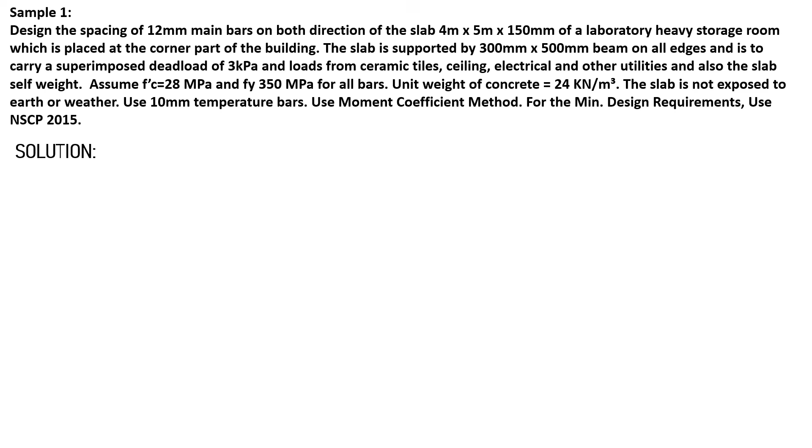Okay, let's begin. This will be our guide for the upcoming solution using the coefficient method. So, let's assume this is our slab. The longer side is 5 and the shorter side is 4.

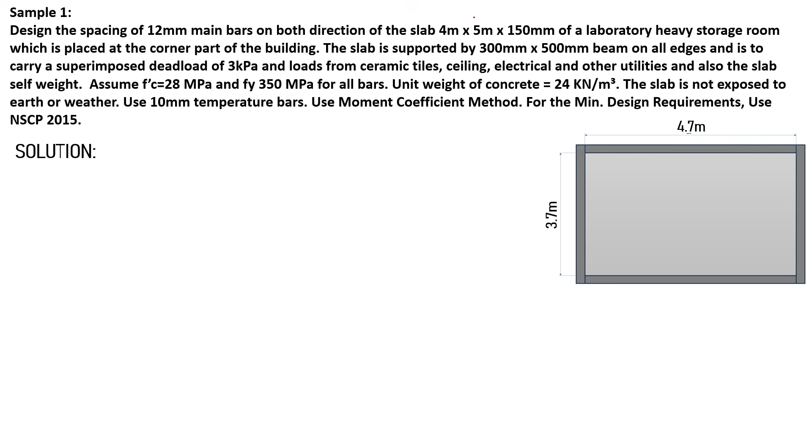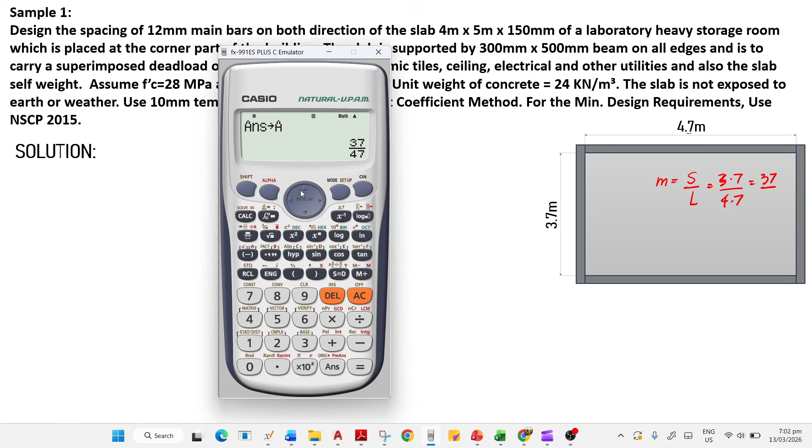So M is the ratio of the short over the long. This is 3.7 over 4.7, that is 37 over 47. It comes out to 0.787. Okay, next let's get the moment in those directions.

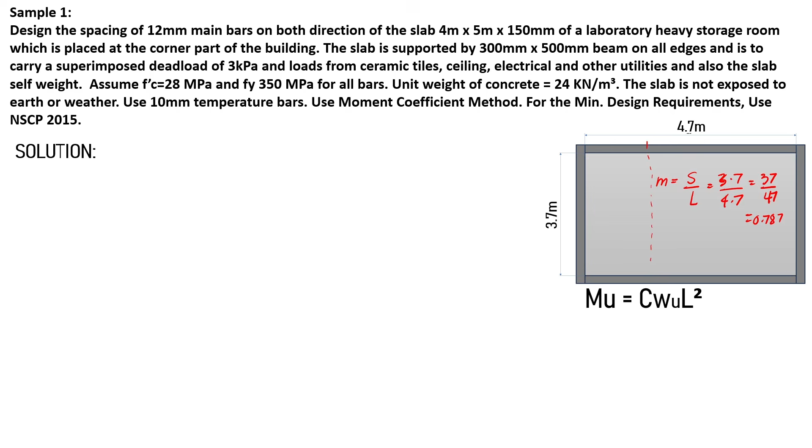So we said that is divided into strips. Along the shorter side and along the longer side, that will be divided into strips. This is called column strip, middle strip, and column strip. Same here - column strip in the short direction, middle strip in the short direction, column strip in the short direction.

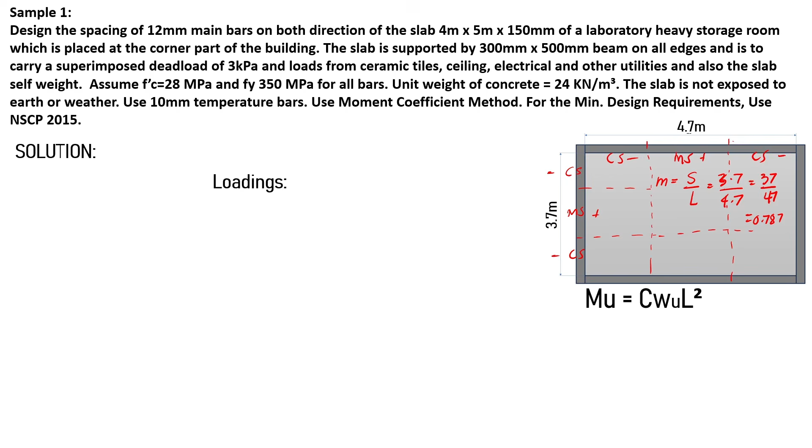So for the loadings, according to the problem, we have the dead loads. We have the superimposed dead load, which is 3 kPa, so we have a load pressure of 3 kPa. We multiply this by 1 meter since we're working per 1 meter strip, so it becomes 3 kN per meter.

Next is slab weight. So the slab weight - we have the area of the cross-section of our design area, which is the height of the slab, 150. So we have 0.15 times 1 meter strip, for a total of 3.6 kN per meter.

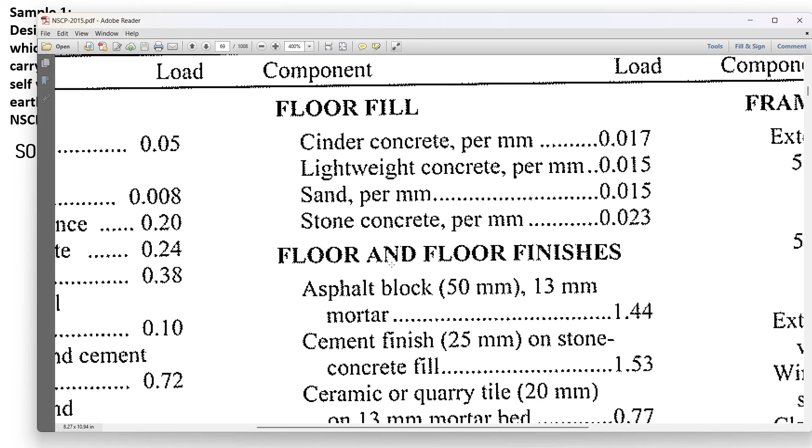Another is the tiles. Using the NSCP 2015 table for minimum design requirements, we have 1.10 for tiles. What I used here is floor finishes, and I used quarry tile with a mortar bed of 25 mm. So we took the larger value, 1.1, and the unit is in kilopascal. So 1.1 times 1 meter strip gives 1.1 kilonewton per meter.

Next is ceiling. For the ceiling, I used gypsum board. So we have this gypsum board, and it's listed per mm thickness - each mm is 0.008 kPa. So let's assume I use 20 mm thick ceiling. I'll just multiply - it becomes 0.16 kilonewton per meter, again per 1 meter strip.

Next is others, like electrical and other utilities - there's piping and various others. So let's assume that's around 0.24 kPa, and we multiply by 1, giving us 0.24 kilonewton per meter. So all in all, we have 8.1 kilonewton per meter as the uniformly distributed load.

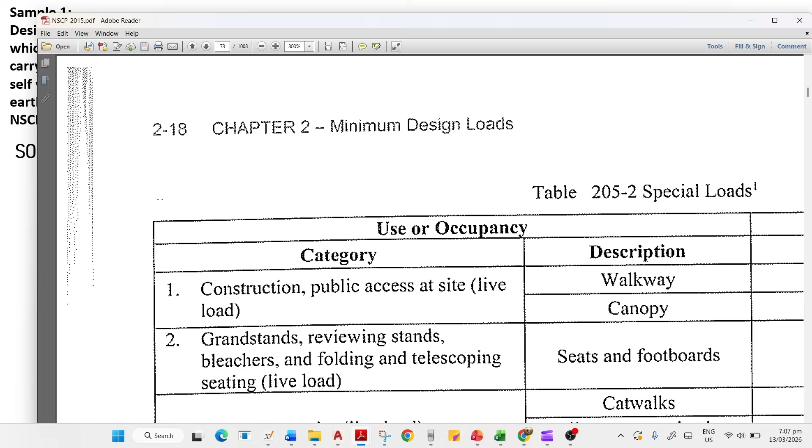Now for the live load, let's call it the service load, WLL. We multiply, getting it from the table as well, so I got 12. Based on NSCP 2015 codes, minimum design requirement for live loads, the use of our building is storage.

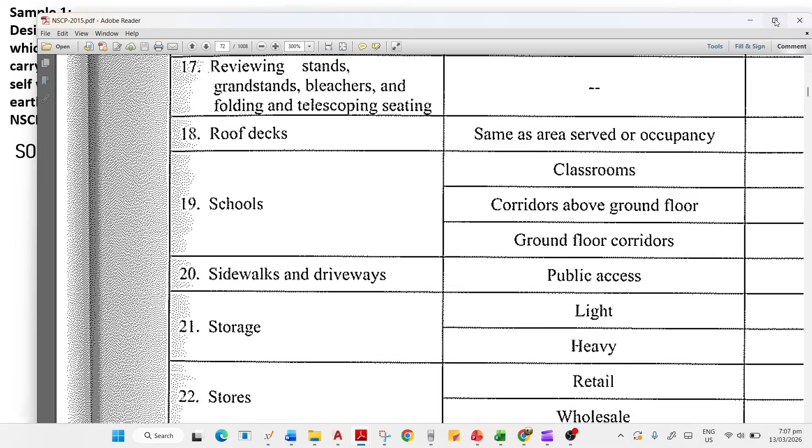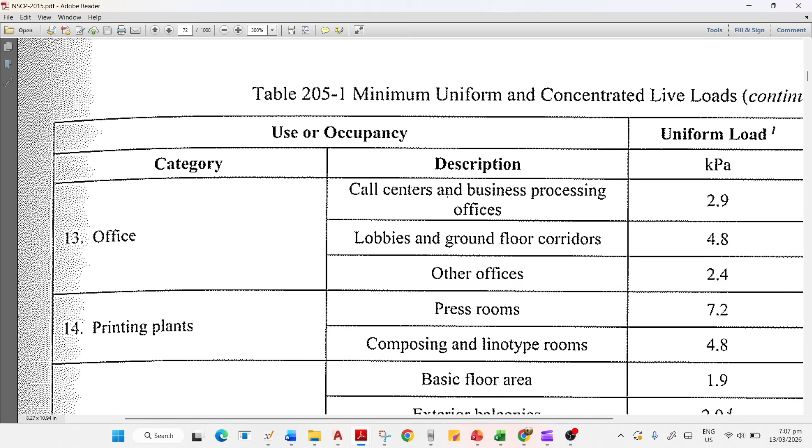So, pwede na to. Number 21. Storage, heavy, yan. Storage is 12 kilopascal. So, sa list ng mga live load, gamitin lang natin tong table 205-1. Tinimes ko lang din ng 1 meter strip.

So we have a 12 kilonewton per meter. Pwede na natin kunin yung factored. Pag dead load, kinuha natin as 1.2 dead load, so we have 9.72 kilonewton per meter. And wuLL is 1.6 live load, so 19.2. Kinuha natin yung total, we have 28.92 kilonewton per meter.

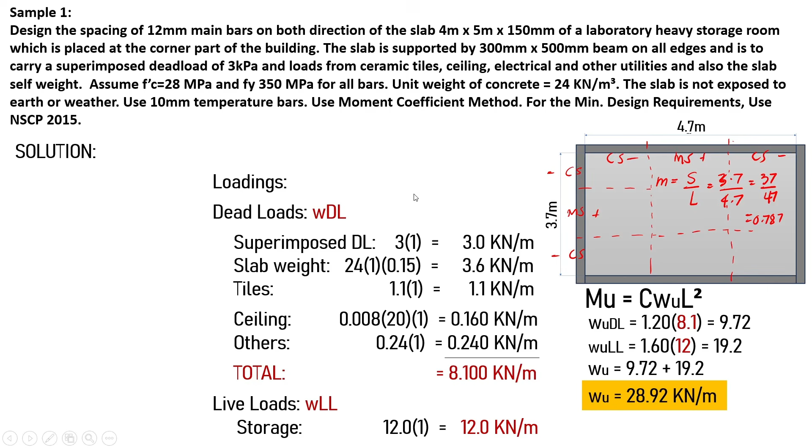Ganyan lang, detailed and ganito yung sa actual ginagawa natin. Importante na makuha natin din yung coefficient. So by coefficient method, I will use the table for coefficients.

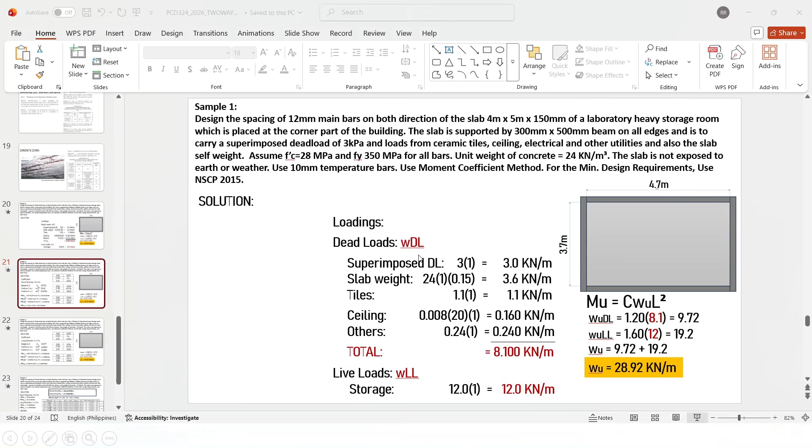Sisimulan ko sa short direction muna. We have 3.7 meters clear span. Kuha tayo sa table number 1. Negative coefficient, kunin ko lang dito. Dinisan ko lang to.

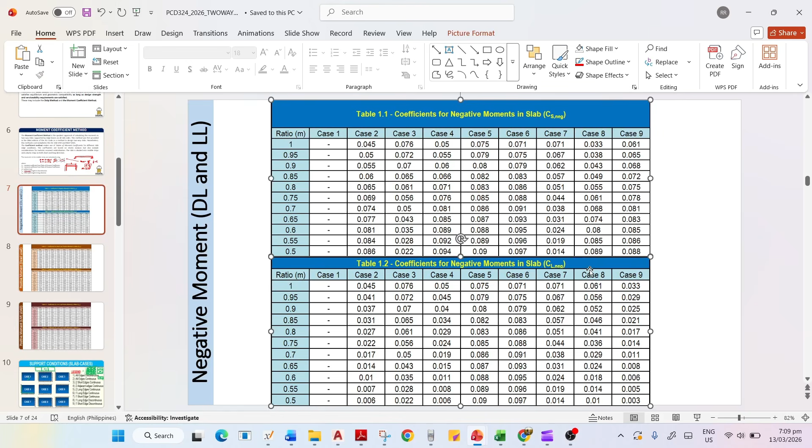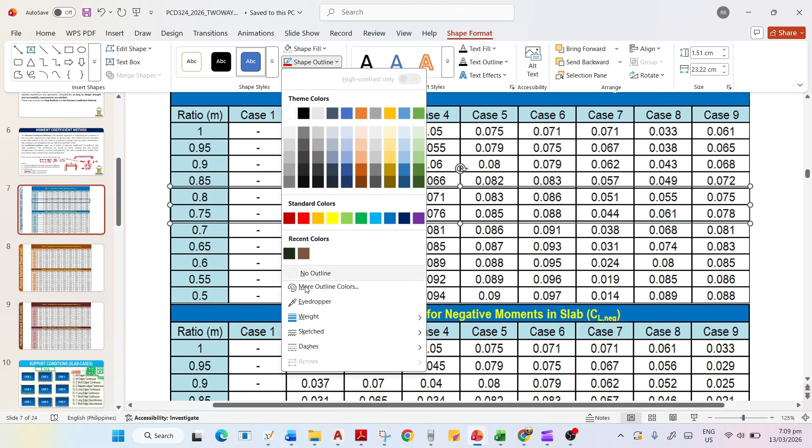Kung pagbabasihan ko yung nakuha natin na ratio, we have 0.787. So pumapatak na dito siya, babagsak dito, sa part na to, dito. And then dito siya, sa pagitan ng 0.8 at 0.75.

So ang gagawin natin, as the introduction said, mag-i-interpolate.

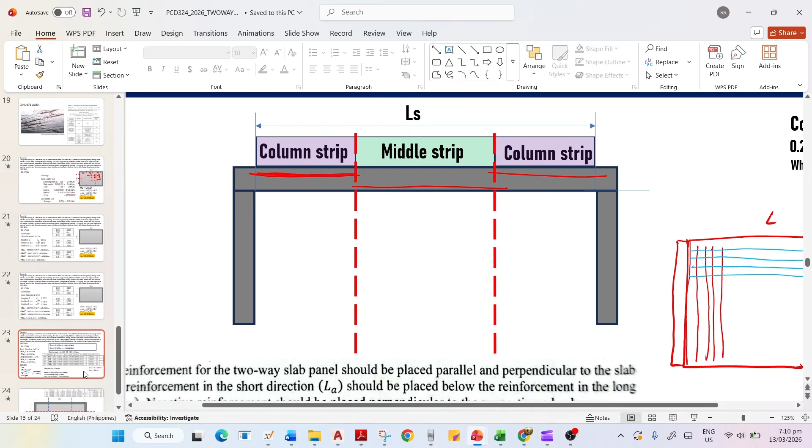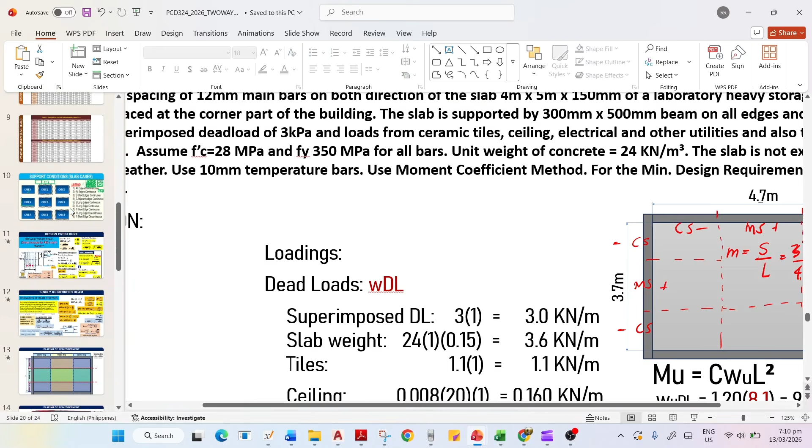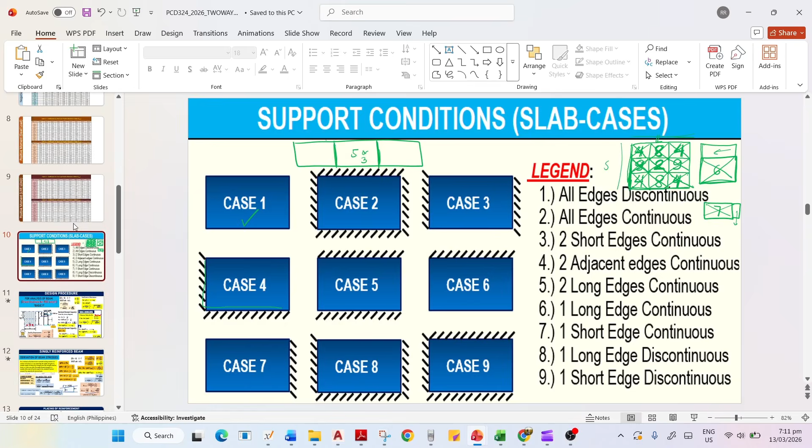Ngayon, gusto lang natin malaman kung anong case yung ating floor, anong condition. Sabi sa problem, our building or our slab is located, heavy storage is placed at corner part of the building. So pag sinabi natin corner, sa condition, it is in case number 4. Balikan na lang yung previous video para sa mga samples na mga nabanggit. So case 4 pala tayo.

Sa case 4, dito tayo mamimili: 0.071, 0.076 between that. So by interpolation ang gagawin ko. Gumawa ako ng isang maliit lang na calculator

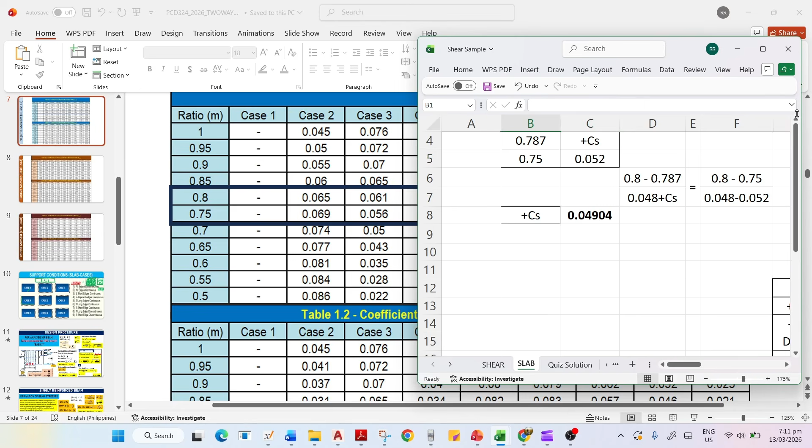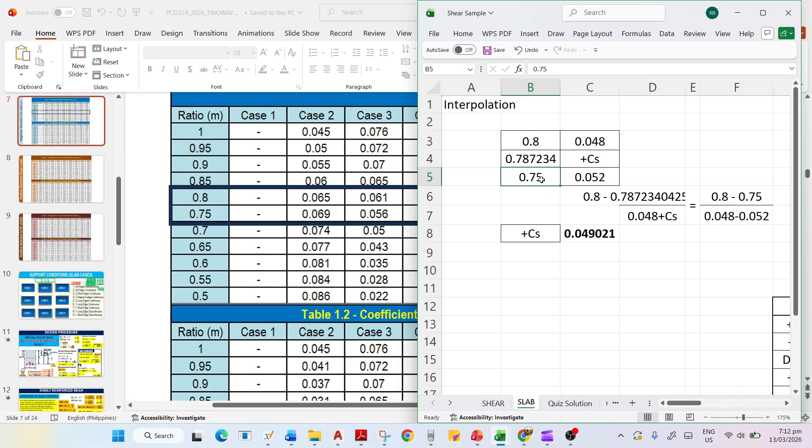Ilalagay ko lang dito yung ating factor 0.8, tapos yung ating ratio, that is 3.7/4.7 diba, para sakto, ay 47 pala. Tapos we have 0.75, tapos pagdating sa case 4, we have 0.071.

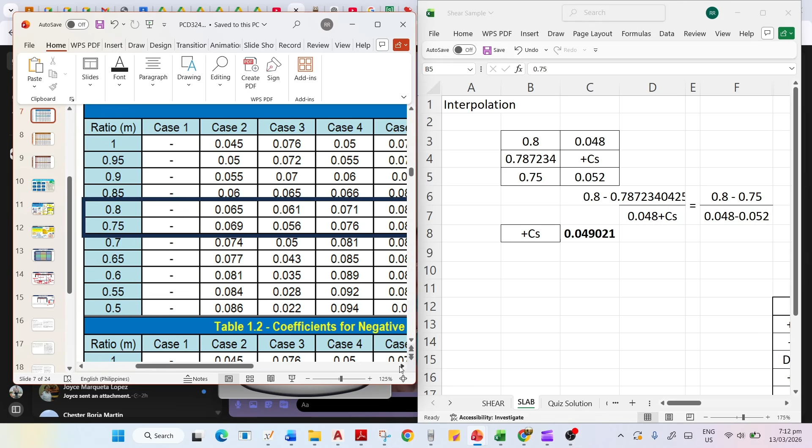At negative ang ating kinukuha sa short direction. And we have 0.076. So meron tayong 0.0723. Sa negative, negative CS, we have 0.0723. Pagdating nga pala sa linear interpolation, manually.

Pwede tayong, ang tawag dito, ang ginagawa ko, 0.8 minus this, tapos sa ilalim, ito minus ito, at ito minus ito, at ito minus ito. So one unknown lang siya, pwede natin makuha yan.

Okay, so proceed tayo. Yan yung sa CS, negative, or negative moment at short. Punta naman tayo sa positive naman.

Yan, positive dead load. Hiwalay kasi ang dead load. Tapos meron din tayong positive live load sa short direction.

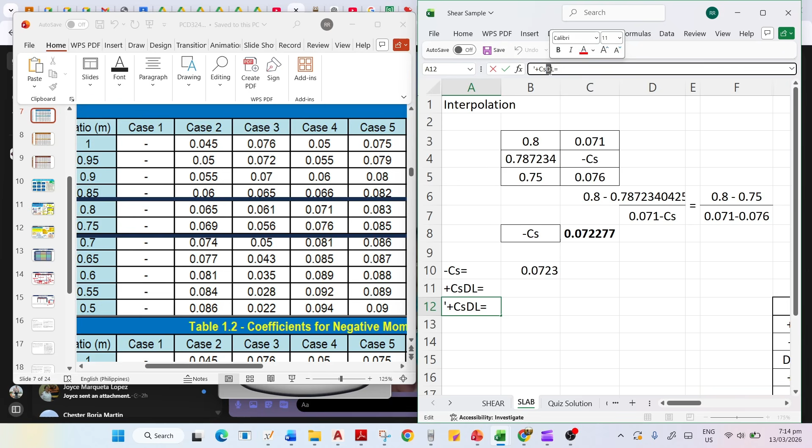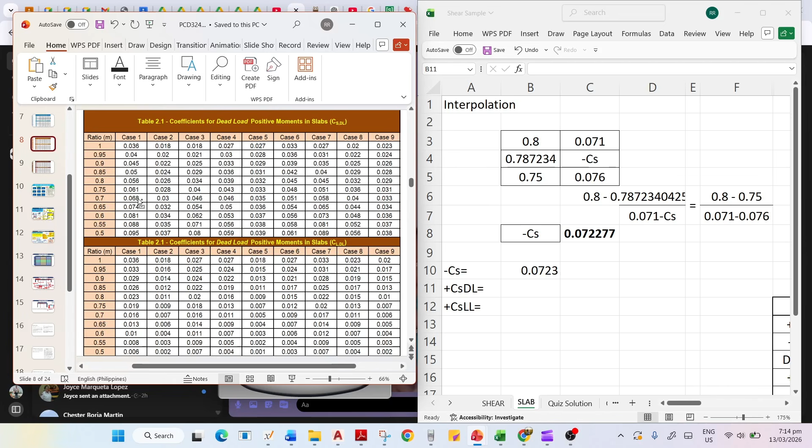Gagamitin ko yung sa table. Kunin ko lang itong marker na to. This one, case 4, 0.8 tsaka 0.75 sa pagitan. So we have case 4, we have 0.039. Tapos ito magiging ano no?

CS po yan. Sabihin natin yun yung X. Tapos this one is 0.043. So meron tayong 0.04.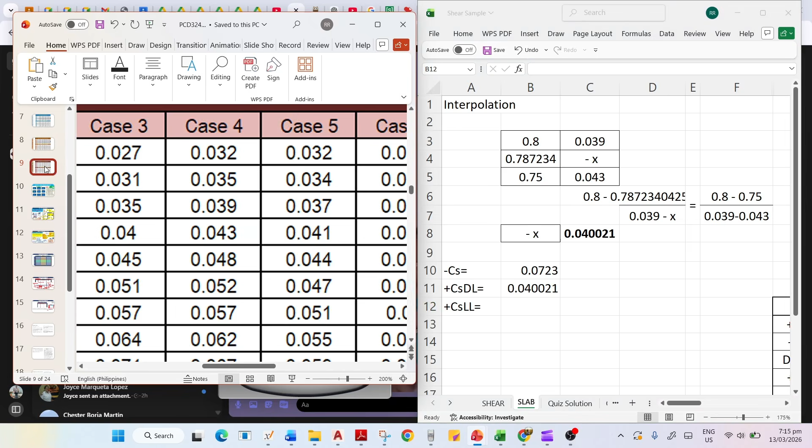0.021, ganyan. Next, sa live load naman, case 4, tapos sa pagitan ni 0.8 tsaka 0.75, obviously that is 0.048 and 0.052.

So we have 0.049, 0.021. So you can do your own interpolation, calculation using calculator po. Salamat po dyan.

At sa longer side naman, para tuloy-tuloy tayo. Sa longer side, ito naman yung table sa baba ang gagamitin ko. So kopya. Palitan ko lang to, instead of S, we have L.

CL. This is CL also. And this is CL.

So balik tayo sa positive. At ito naman ang gagamitin ko. Sa pagitan ni 0.8 at 0.75, case 4, 0.029 tapos 0.024. So we have 0.027723, ay sorry, baliktad, dito ko dapat nilagay, 0.027723.

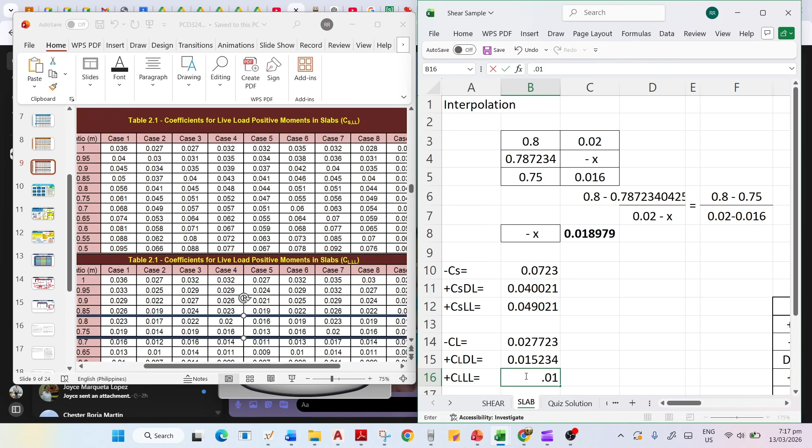Yan. We have here case 4.8. 0.016 and 0.013. So, meron tayong 0.01523 po. So, lastly, we have case. Ayan, sa baba tayo. Pagitan ni 0.8 and 0.75. Case 4, 0.02 and 0.016. So we have 0.018979. Yun, natapos din. So dapat dito makuha natin yung tamang coefficient.

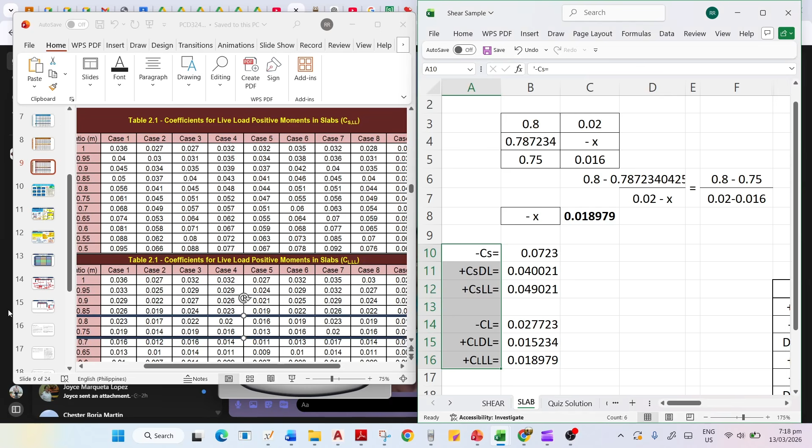Kaya nga siya tinawag na coefficient method, no? Approximate method. So tignan ko nga kung tama yung aking mga nagawa sa aking solution. So by coefficient sa short direction, nakakuha ko ng 0.0723. Next, sa positive dead load, 0.040. We have 0.049021. Okay na yan. Hindi ako nag-round up dito. Dito nag-round up ako.

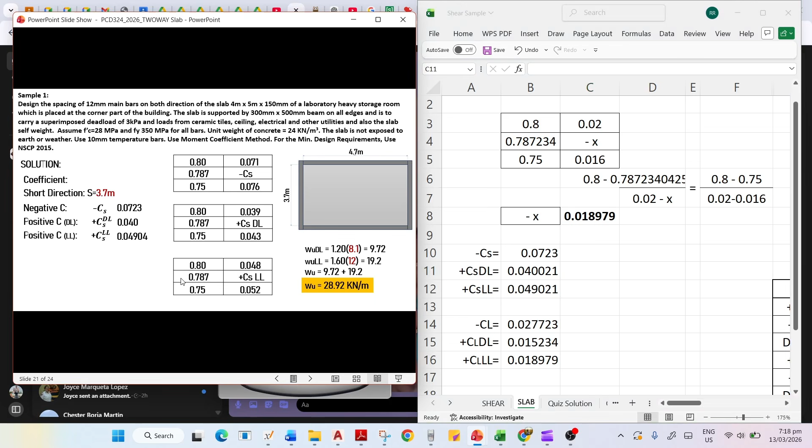Next, sa short direction, tuloy-tuloy na natin. Kuha ako ng moment. Using the formula, M is equal to C W L squared. Kitang-kita naman na ang negative moment natin is 28.624. Tingnan nyo, 3.7 yung length. Then, nanguha ako ng dead load positive, 0.04. But take note, yung dead load coefficient is dependent on the dead load itself. So ang gagamitin ko lang is yung WDL, 9.72. Paki-take note yun.

Sa live load naman, ang gagamitin ko is yung live load, 19.2, at ang coefficient is yung sa live load. Dependent po yun sa isa't isa. So we have 12.89. Pag negative, magkasama na si dead load at si live load. Sa positive, magkahiwalay sila, so ito total mo sila. 18.213. Meron lang tayong dalawang moment sa short direction, isang negative, isang positive. Yung positive ay yung middle strip and yung negative is yung column strips. We will do the same sa long direction.

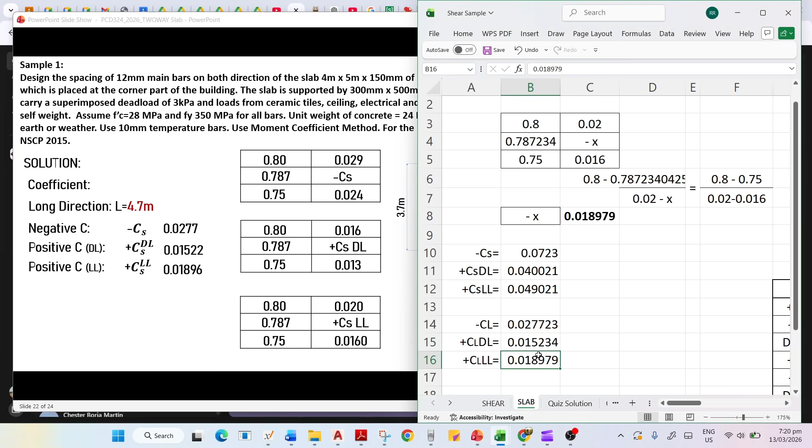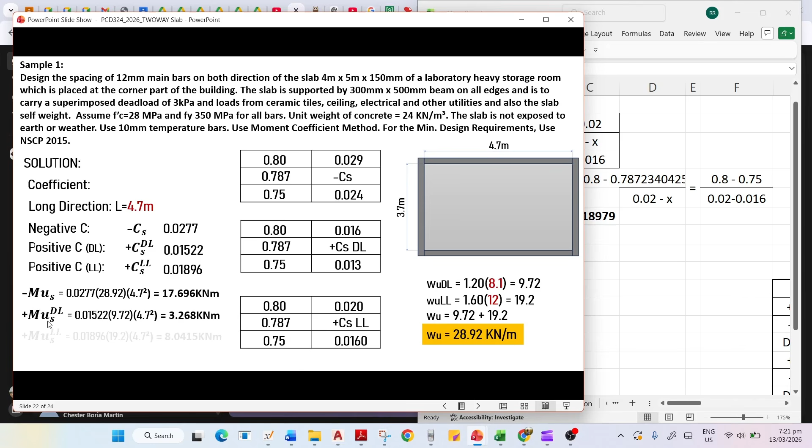Sa long direction, ito yung nakuha natin, 0.0277. Next, we have 0.01522. Then, we have 0.01896, by interpolation po. So we will do the same. We have negative. Medyo may pagkukulang ako dito. Sa long, dapat ito L. Edit lang natin. Dapat ito sa long, para di tayo malito.

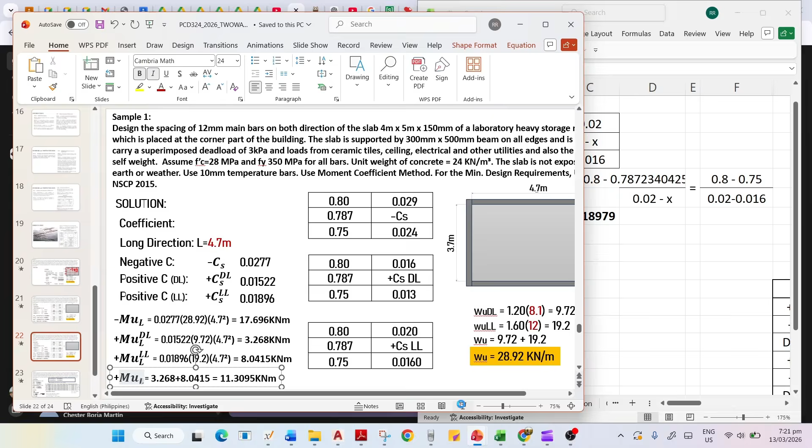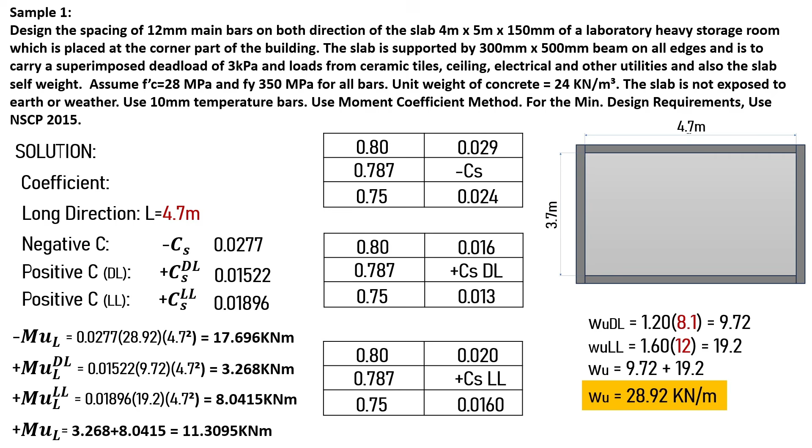Malinaw na lalagyan natin ng konting oras ang moment, kasi pag nakuha natin yung moment, magde-design na lang tayo. Madali na lang yon. Gamit lang tayo ng basic concept natin. From MU, we have to get Rn. Si Rn gagamitin mo sa rho using this formula. And we have As is equal to rho b d. Kuha na natin yung apat. Pero meron pa akong idadagdag.

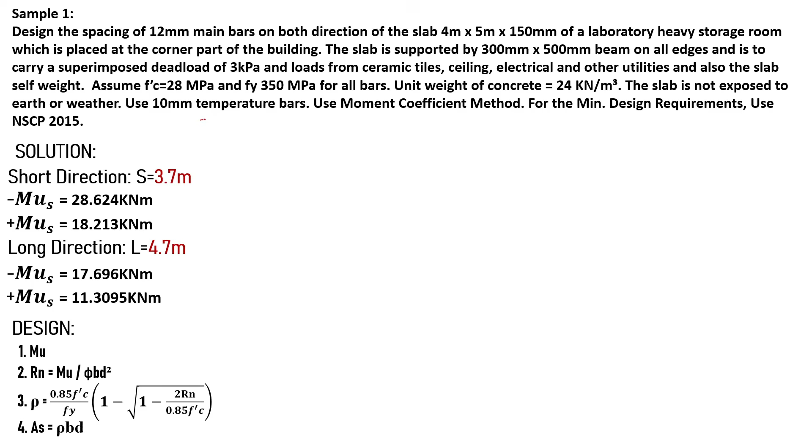Nabanggit na problem na case 4 siya. Ibig sabihin, kapag case 4 ka, nasa corner ka. Pagpalagay natin na ganito yung slab mo, yung beams. Ito yung dinidesign natin, 5 by 4. Kapag hinati natin into strips along the longer side, yung isang side ng case 4 is discontinuous. Dito naman sa hati ng short side, ang discontinuous niyang part ito. So dapat meron tayong i-add na moment para sa discontinuous.

Yung moment sa discontinuous is nasa negative portion, nasa column strip, para sa short. Para naman sa long, ang discontinuous niya is nasa column strip din, so negative discontinuous din. We can now solve for discontinuous. If there is a discontinuous moment, we need to get 1/3 of the positive moment calculated in this direction. This is 18.213. Dito naman, 1/3 sa long direction, 11.3095.

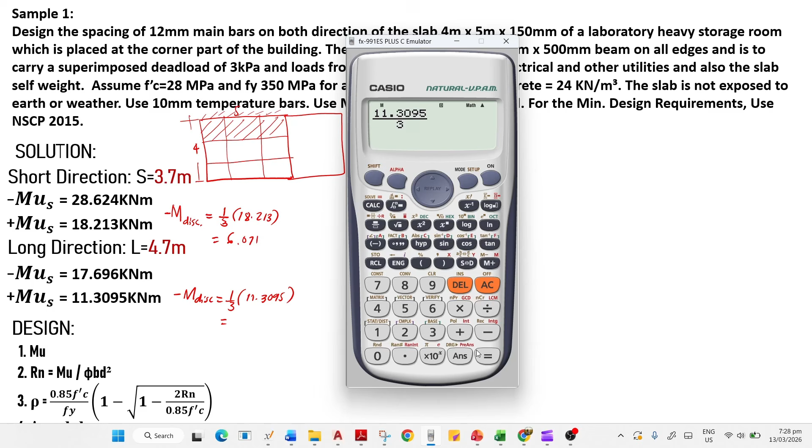1/3 ng 18.213, over 3, we have 6.071. And the other one is 11.3095 over 3, 3.77. So tatlong moments. I-distribute ko yung moment natin sa short direction para maunawaan natin. Along the short direction, tingin po kayo dito.

Yung in-highlight ko, ito yung slab, tapos ito yung support. Magkakaroon niya ng ganyang moment diagram: negative moment and a positive moment. Si positive moment niya, ito yun, positive moment ng short direction. While yung negative moment sa left side is yung discontinuous, MD. While this one sa right side is continuous.

So, 28.624. If we examine the position or the placement of the moment. Pagdating naman sa longer side, if I draw the slab again.

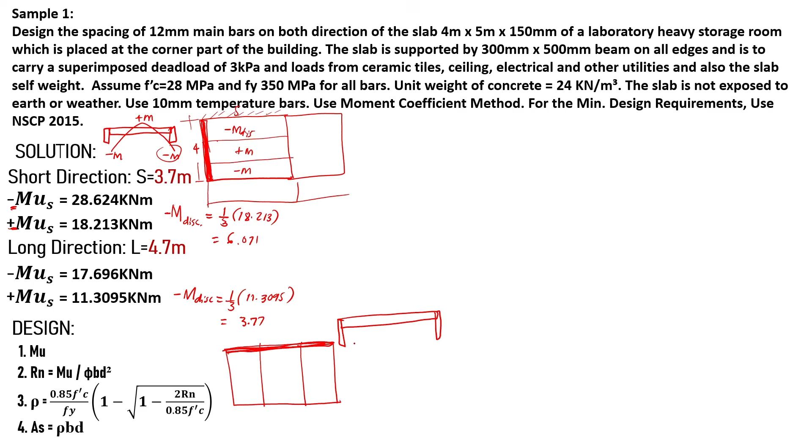Ito yung moment diagram niya. So, ito yung negative moment, positive moment, negative moment. Column strip, middle strip, column strip. So, if you can see here, dito, this is your left side. Ganyan lang yan. Ito yung right side.

So, ang discontinuous, ito. Diba? So, this is your discontinuous. And this one is your positive moment. And this is your continuous. So, ang ilalagay ko sa positive moment is ito. Ang ilalagay ko sa discontinuous is ito. And ito naman sa negative.

Nakuha. So, kung iisa-isahin mo yung design, bawat moment, makakakuha ka ng kanya-kanyang spacing. So, let me try to do that. Okay? So, using an effective depth of, di ba binigyan tayo ng 150.

I-minus mo lang yung cover, i-minus mo yung position ng bar, which is 12 mm over 2. So, we have 124. Ganun pa rin sa pagkuha ng effective depth. And then, we are assigned to get the 1 meter strip. So, ang b is 1,000.

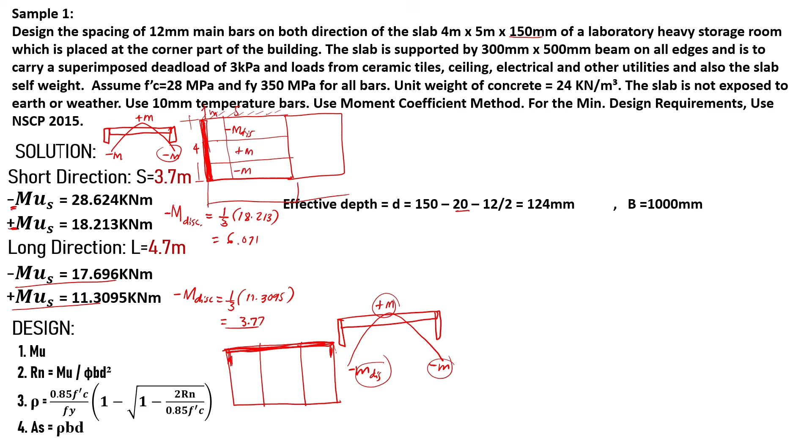So, parang ganito yan. Kada 1 meter strip. So, 1 meter. Kada 1 meter strip, kahit gano'n pa kahaba yan. Gumawa na ako ng calculation sa Excel. Pero, pakita ko lang as sample yung unang moment, para lang mapamiliarize kayo ulit.

So, gamitin natin yung Mu na 18.213. So, para sa Rn, we have 18.213 times 10 raised to 6 over reduction 0.9. Ito yung ginagamit ko. 1,000 and then d 124 squared.

So 1.3161. Store natin sa A for example and then get our rho. So sa rho, ito lang yung formula natin, 0.85 f'c 28 over fy 350, 1 minus square root of 1 minus 2Rn, in-store ko sa A, over 0.85 f'c, 28.

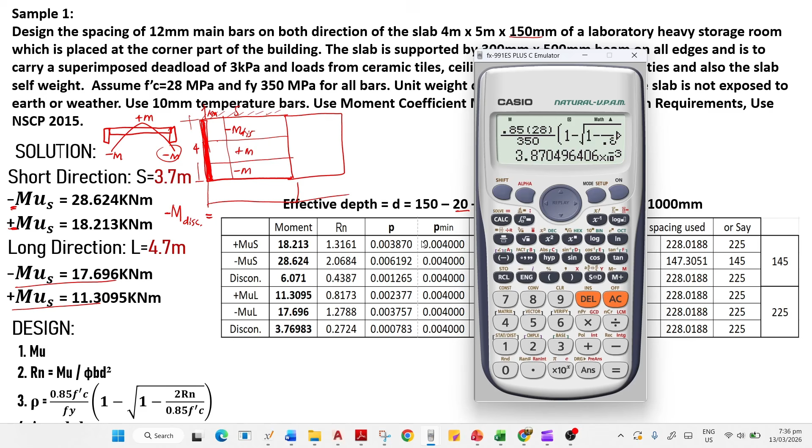So, we have 0.003870. Pwede natin i-store sa B. Tapos, kumuha ako ng rho minimum. I-compare kasi natin yan. So, 1.4 over fy, 350. Dalawa kasi yung pinag-compare natin. Usually, yung isa naman is square root of f'c over 4 fy. So, nag-govern yung ating 0.004.

And sa rho max is 0.85 beta 1, 0.85 f'c 28 over fy 350. Ita-times natin yan sa 3 over 7 kapag rho maximum. Actually, ang ginagamit talaga ngayon sa 2015 is doon sa rho max. Pero this time, ang ginamit ko is 3 over 8, kasi nag-assume na ako agad ng tension controlled. So, ang maximum doon is at tension controlled 3 over 8. Kaya 0.02168. Anyway, kapag slab, bihira na maabot nito yung rho max.

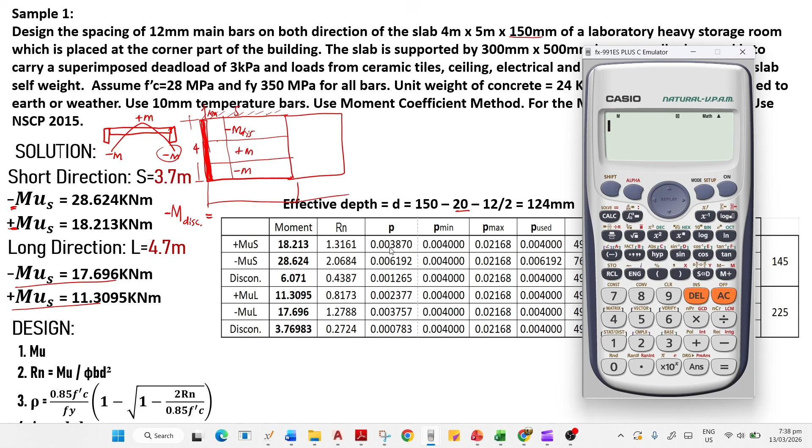So, mamimili ka ngayon. Pumasa ba yung rho mo sa rho min? Kung titignan mo, yung rho ko is mas maliit pa sa rho min. Ibig sabihin, hindi pwede yun. Dapat rho min ang mag-govern. Kaya use rho is 0.004. Technically, mababa din siya sa rho max. So, ito talaga ang gagamitin ko.

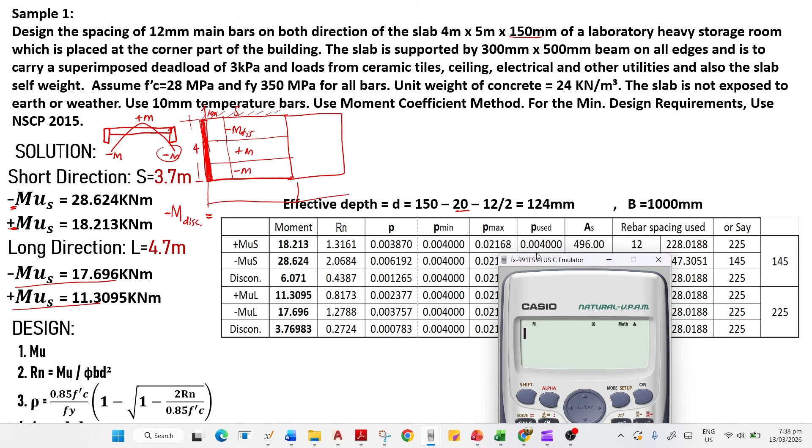So, next is yung As equals to rho bd. Yung rho natin na 0.004 ay times mo na lang sa bd. Ayan, 496. Okay?

So, using a 12 mm bar. Ang formula natin dyan, area ng bar over the area na nakalculate, 496. Times mo pala ng 1,000 yun. Yan, 228.02. Or say, 225.

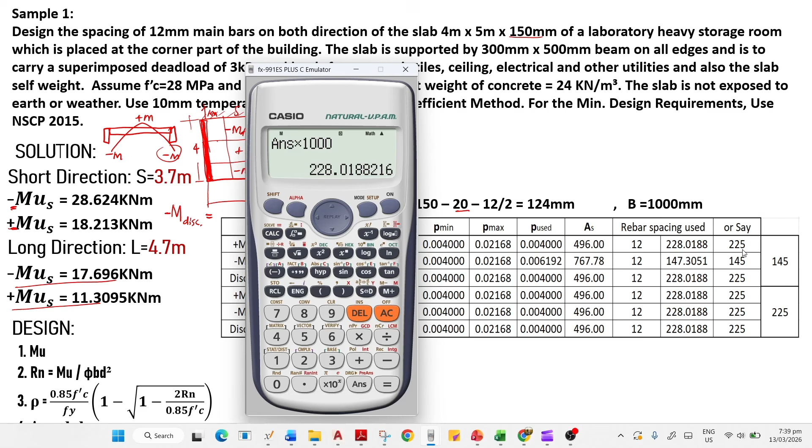So, ginawa ko siya sa lahat ng piraso ng moment na nakuha natin. So, we have 6, kasama na yung discontinuous parts. May mga discontinuous kagaya ng case 4, case 5, case 8. Pero pag nasa loob naman, madalas 4 lang. So, kayo na mag-check ng part na to.

So, ang huli kong mga nakuha is 225, 145, 225, 225. Usually, nag-govern na yung rho minimum sa mga maliliit ang moment. Nag-iba lang ang sagot dito sa 28 kilonewton meter na negative moment, 145. Para i-maintain natin yung consistency ng spacing, kunin natin yung pinakamaliit sa kanilang tatlo along the short direction. So, along the short direction is 145.

Pagdating naman sa long is 225. Para pag nag-drawing tayo, iisa na lang yung spacing natin. Kumbaga practicality sa site. Kung tutuusin, 150 daw yung conventional na spacing ng mga bakal sa conventional slab. So, yung 225 dito, baka pwede pa tayong mag 200 dyan. Okay?